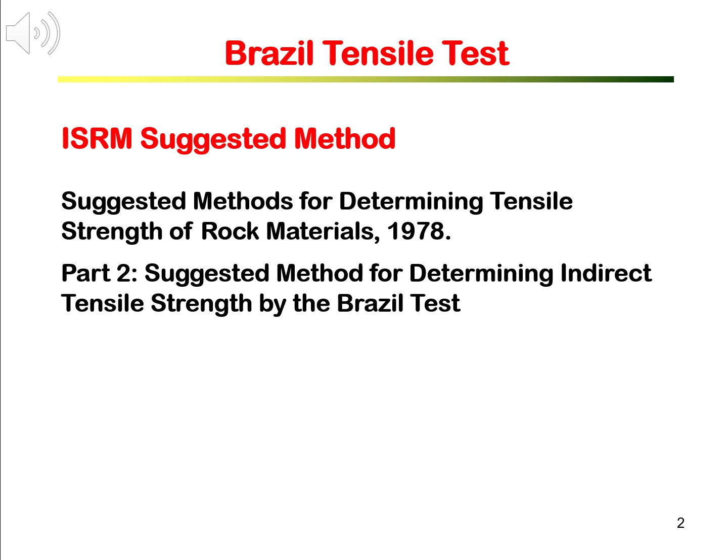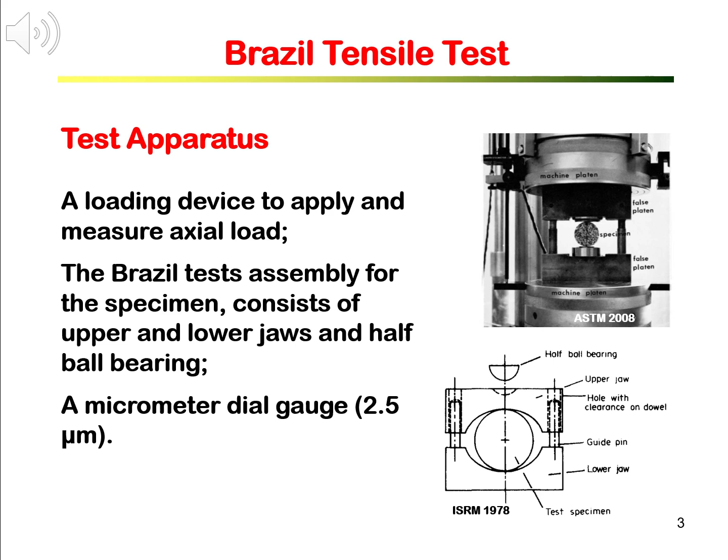We mentioned earlier that the test specimen is a circular disc, commonly cut from rock cores. Specimens are circular discs with a thickness to diameter ratio of 0.2 to 0.75. The diameter should be approximately 50 mm, and the thickness therefore should be between 10 and 35 millimeters. The cylindrical surface should be free from obvious tooling marks and should be smooth. Any irregularities across the thickness should not exceed 0.025 mm. The two end faces should be flat to within 0.25 millimeter and parallel to within 0.25 degree.

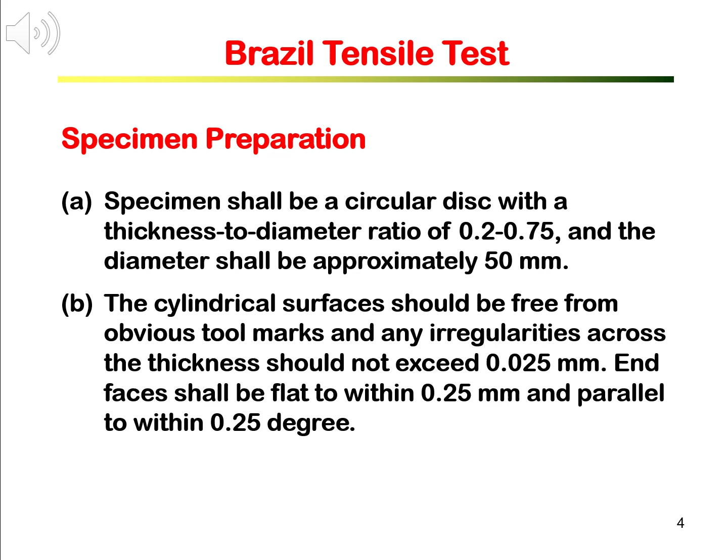To perform the test, we should have the specimen wrapped around its periphery with one layer of masking tape. Then we place the specimen between and in the center of the jaws of the Brazil assembly. Make sure that the curved platens load the specimen diametrically. Attach the micrometer dial gauge so it can measure the closure of the jaws. Now you are set and ready to load.

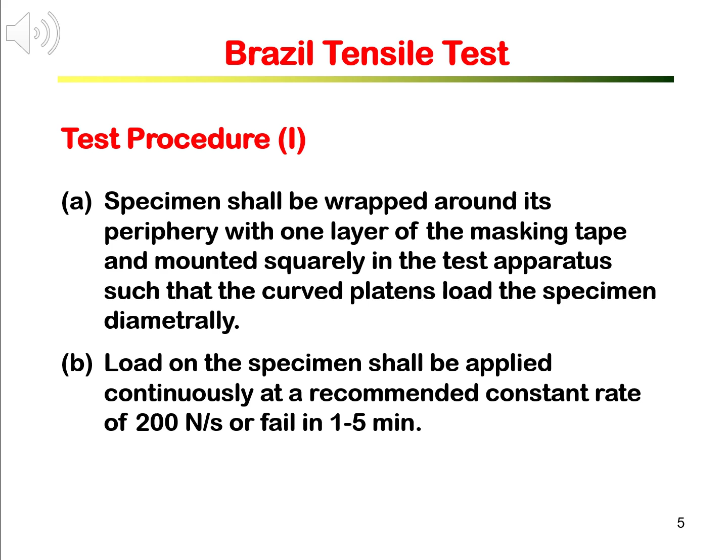Apply the load on the specimen continuously and gently, at the recommended constant rate of 200 Newtons per second, so you can fail the specimen in 1 to 5 minutes. During loading, measurements of load and displacement should be recorded. It is important to record the load when primary fracture is observed, because this load is the load at failure. If loads are recorded automatically by a data logger, you can use the peak load as the failure load.

10 specimens per sample should be tested, or based on practical considerations.

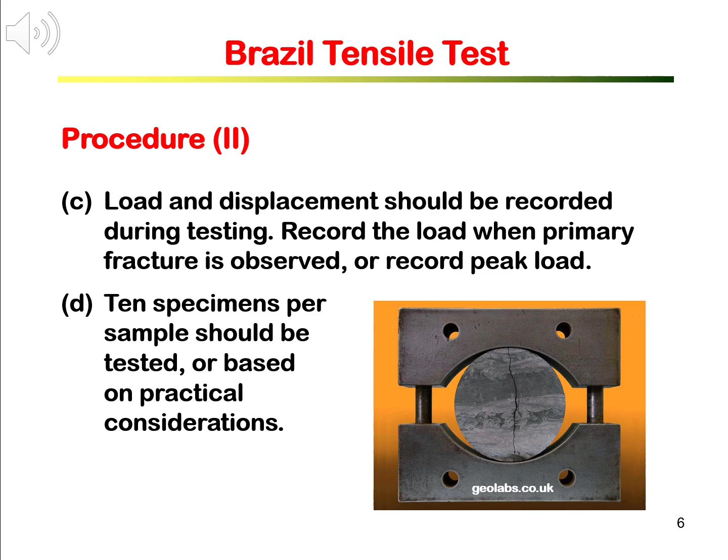From the test recorded load at failure, or peak load, we can calculate the tensile strength by the equation: sigma t equals 2P divided by pi DT. In this equation, P is the load at failure in Newtons, D is the diameter of the specimen, and T is the thickness of the specimen. Both D and T are in millimeters. The calculated tensile strength is in megapascals.

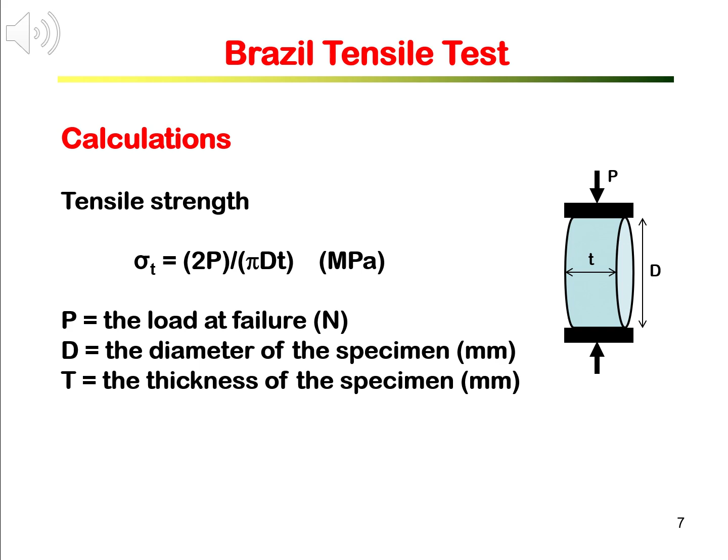Theoretically, 2P divided by pi DT is the maximum tensile stress along the diameter across the loading points. This tensile stress acts to split the disc along the diameter across the loading points. The maximum tensile stress is at the center of the diameter line. If the test is done correctly, the maximum tensile stress occurs around the middle of the diameter line across the loading points.

The specimen should fail by splitting along the diameter across the loading points. If failure is localized failure, not by splitting the disc along the diameter, then the test is not valid. The data from this test should not be used for strength calculation.

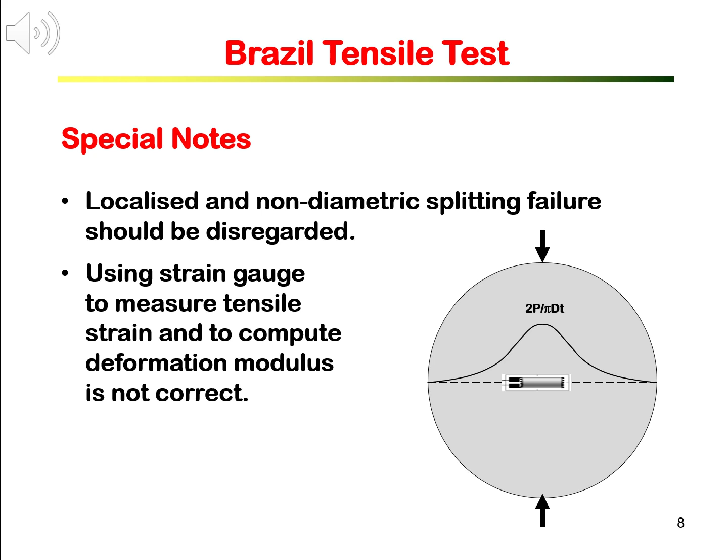Report on Brazil tensile strength tests should include the following information: A. Rock sample information, including lithological descriptions, grain size, rock anisotropy, sample location depths, sampling date and methods, storage history and environment. B. Specimen information such as number of specimens, method of specimen preparation, diameter and thickness, and water content observation.

C. Date of testing and test duration, number of specimens tested, machine information, and the loading procedure. D. Descriptions of failure and other observations, photographs of specimens before and after testing. E. Recorded loading at failure or the peak load. Calculated tensile strength for each specimen expressed to 3 significant figures, together with the average tensile strength for the sample.

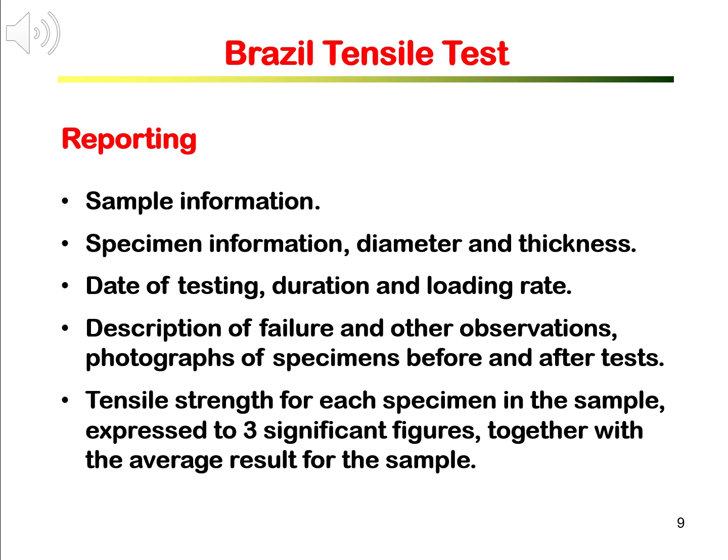Point load test is a test specially designed and used for rock testing. The strength determined from the point load test is the point load strength. It is a simple test to perform, particularly on rock cores, without the need to prepare specimens. In this part, we will go through how point load tests are performed.

The suggested procedure to conduct the point load test is given by the ISRM suggested method made in 1985 by the International Society for Rock Mechanics and Rock Engineering.

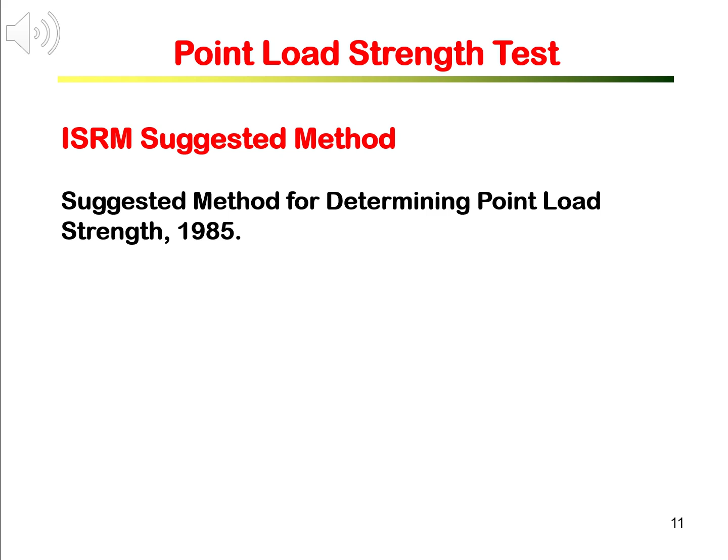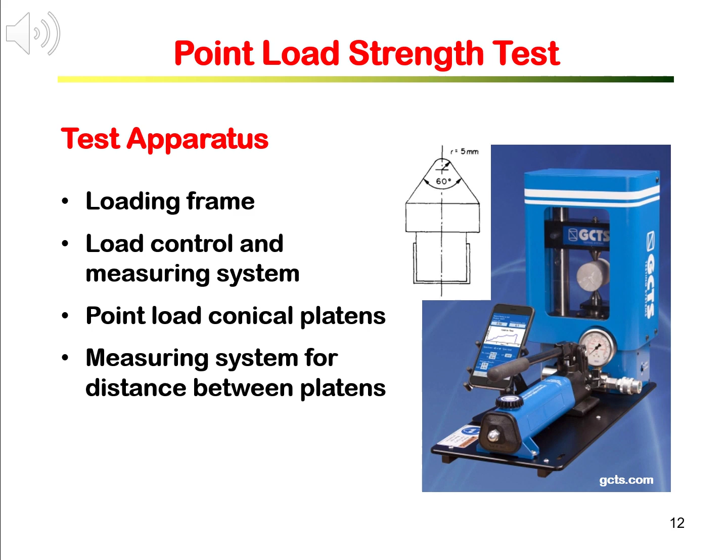Point load tests were initially designed for testing rock cores, by inserting a long core between the point loading platens across the diameter. The load is applied along the diameter of the core, breaking it across the diameter. We continue testing along the length, so we can do many point load tests on a long core and obtain many point load strengths quickly. This is the most common way to conduct the point load test.

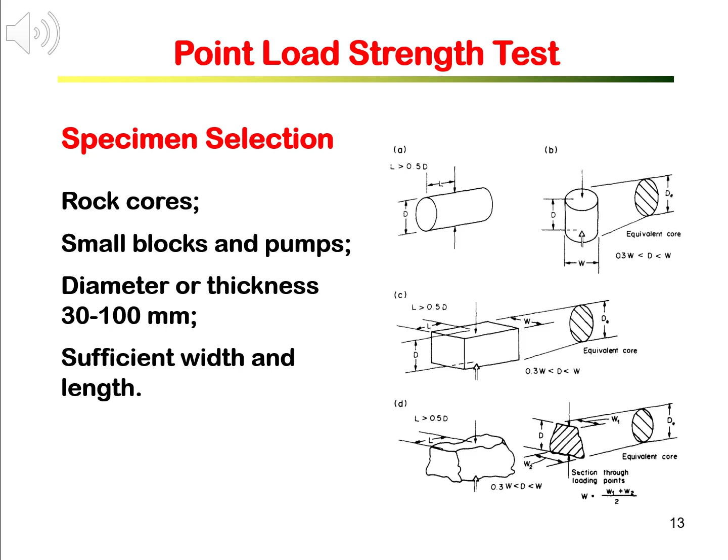The basic test procedure is to put the rock specimen between the two loading points of the conical platen and load the specimen to break. For tests on core specimens, the point load is applied across the diameter — usually referred to as diametrical tests on core.

We start by measuring and recording the core diameter, and make sure the core has sufficient length so that the loading point to the core end is at least 0.5 D. Then we insert the specimen in the point load device and close the platen in contact with the core along the diameter, as in the illustration.

Then the load is increased steadily such that failure occurs within 10 to 60 seconds. The failure load or peak load is recorded.

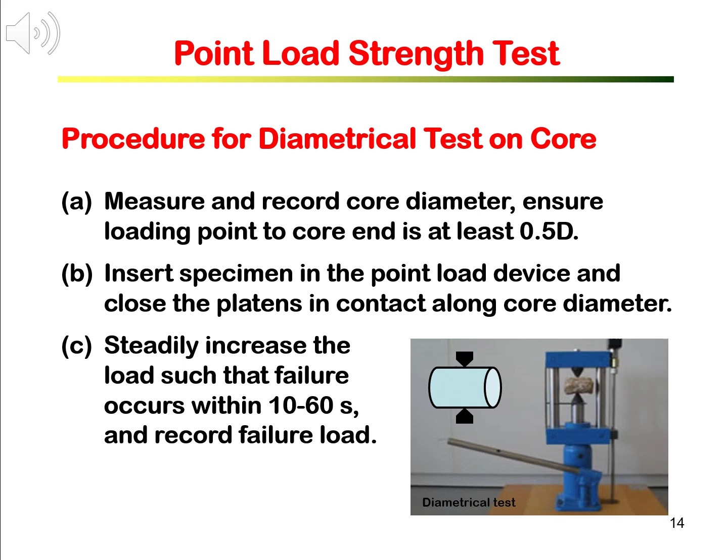If we have the core cut in a short cylinder or thick disc with thickness greater than 30 mm, and the thickness to diameter ratio between 0.3 and 1, then the point load test can be done by loading on the two flat ends and along the axis.

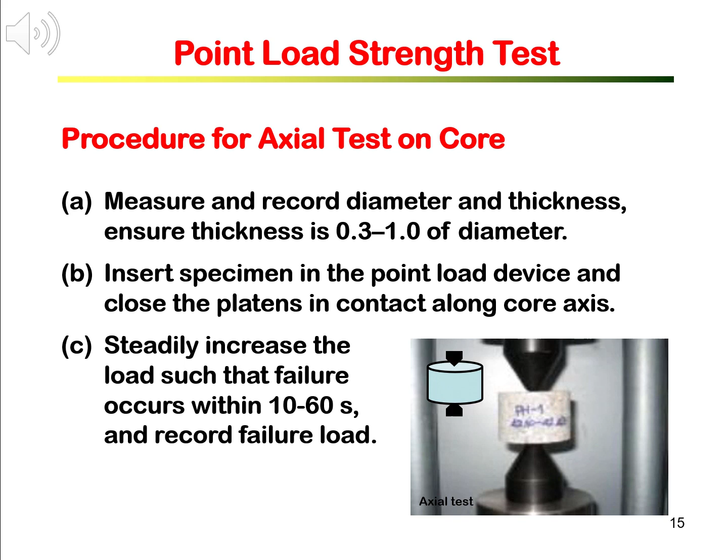Point load tests can also be done on cut blocks or regular shapes. The thickness must be more than 30 mm, and width and length should be greater than the thickness. Specimen thickness should be measured and recorded.

We can conduct point load tests at the site and in the field, where specimens are natural blocks or lumps. Select blocks close to rectangular or cubic shape with thickness greater than 30 mm, and width and length greater than thickness.

It is difficult to measure the specimen thickness directly. Instead, we should measure the distance between the two loading points after the specimen is inserted and held by the point load platen. This is the thickness of the specimen along the loading line.

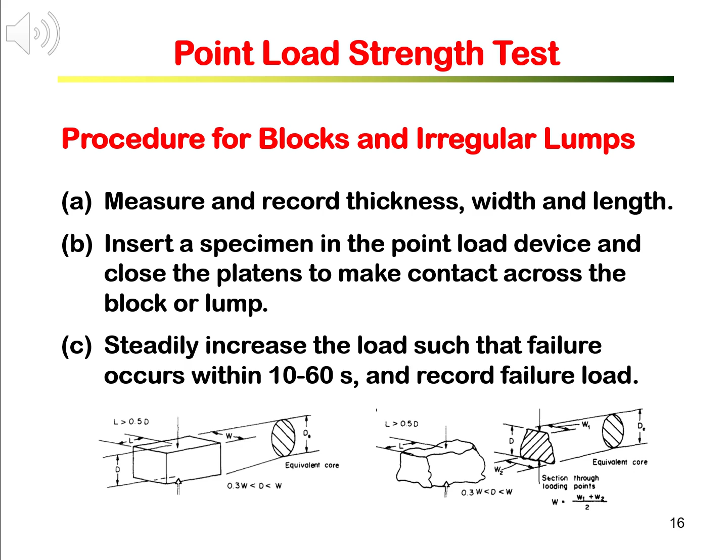The loading procedure is the same as before. After inserting between the loading platens, apply load steadily to break the block in 10 to 60 seconds and record the failure or peak load. In point loading, the rock specimen breaks across between the two loading points.

Point load strength is defined as the failure or peak load P divided by an equivalent area of the breaking surface. So the dimension of the point load strength is the same as stress, usually in megapascals for rocks. We first calculate the uncorrected point load strength, IS, as P divided by dE squared.

Because the point load test is originally for testing rock cores, dE is therefore the equivalent core diameter. For a diametrical test on cores, dE equals the actual core diameter d. For an axial test on cores, blocks, or lumps, the minimum breaking plane is rectangular.

The equivalent diameter dE squared is 4A divided by pi, where a is the minimum cross-sectional area of the plane through the two loading points, which is the minimum width through the loading axis times the thickness between the loading points.

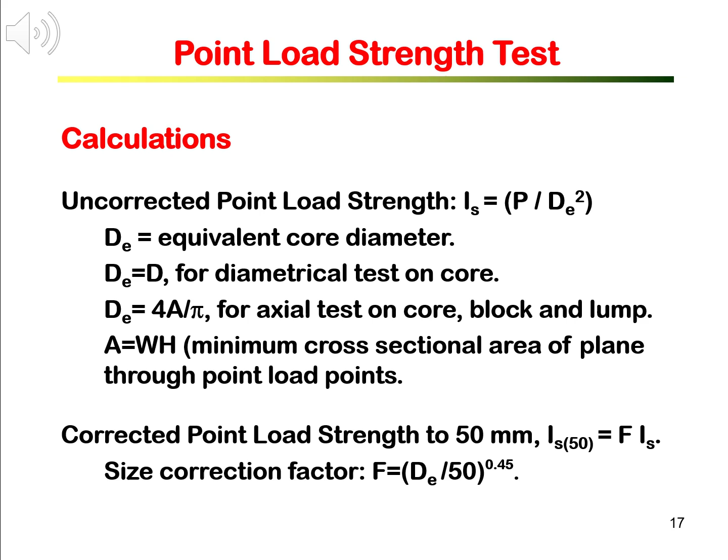Standard point load strength IS50 is a stand-alone strength index used in rock mechanics and engineering.

For samples with anisotropy, the angle between the loading axis and the weak plane must be specified. Anisotropy has a great impact on point load strength. When the weak plane is parallel to the loading axis, it gives the lowest point load strength.

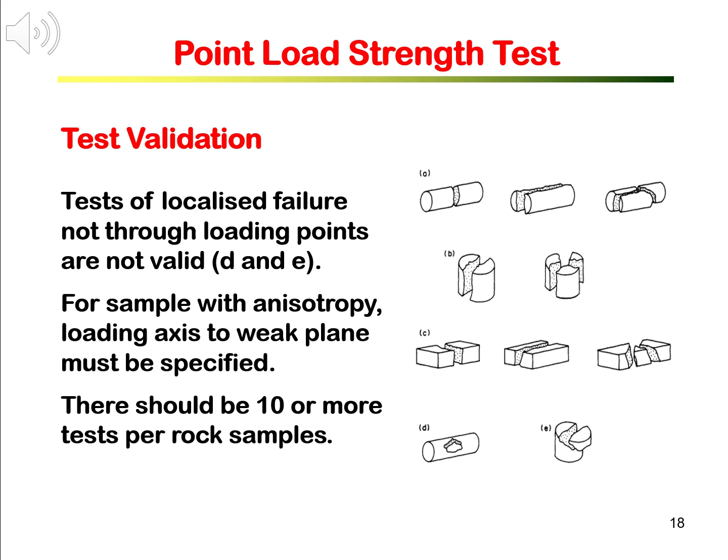There should be at least 10 tests conducted per rock sample. The point load test report should include the following descriptions and results.

A. Rock sample information, including lithology, sample type (whether core or natural block), its anisotropy, sampling location and depth, date and method, and sample conditions.

B. Specimen information and measurements, such as number of specimens, method of specimen preparation, specimen shape, specimen size, and the measurements.

C. Testing information: testing date, machine, number of specimens tested, failure pattern descriptions, and photographs of samples before and after tests.

D. The results: tabulated values of size measurements, peak load, IS, F, and IS50 for each test, and average IS50 for each sample.

We are coming to the end of this session. We covered Brazilian tensile tests and point load tests on rock materials.